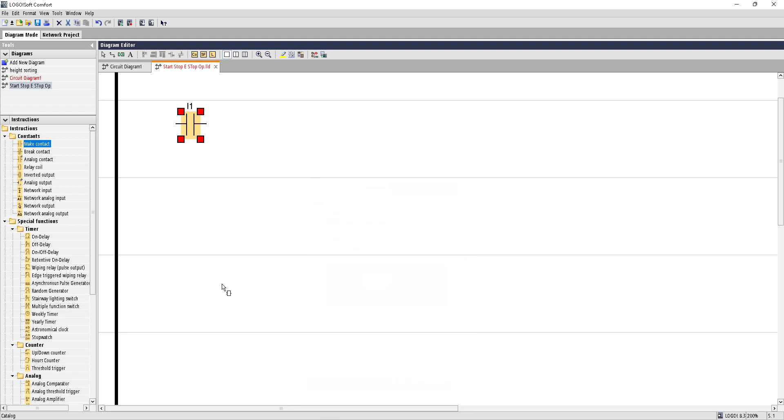So for the start switch we will bring in a make contact with I1 input, and in the simulation tab we will choose momentary push button. For the break operation, that is for the stop switch, we will need a break contact; it would be our I2 input. In simulation we will make sure it is momentary push button.

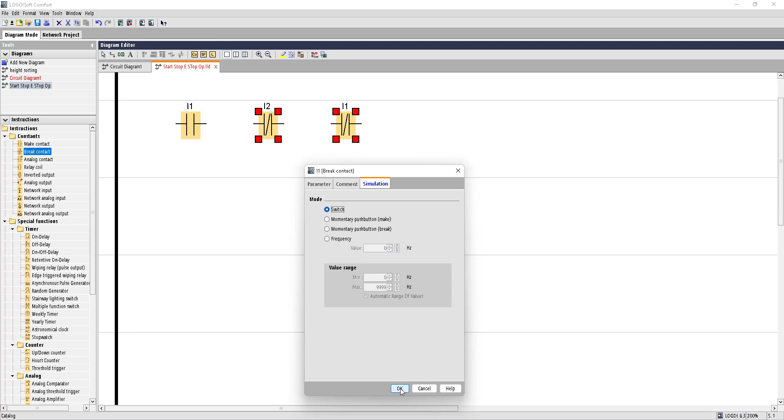And for the emergency stop switch, it's also a break contact; we will choose I3 for the emergency stop switch, and in the simulation tab we will choose switch for emergency stop operation. Now we'll bring in the output, that is our conveyor belt, as Q1. For the latching operation we bring in a make contact, and this make contact would be for Q1. So go down and choose Q1 here. Let's connect them.

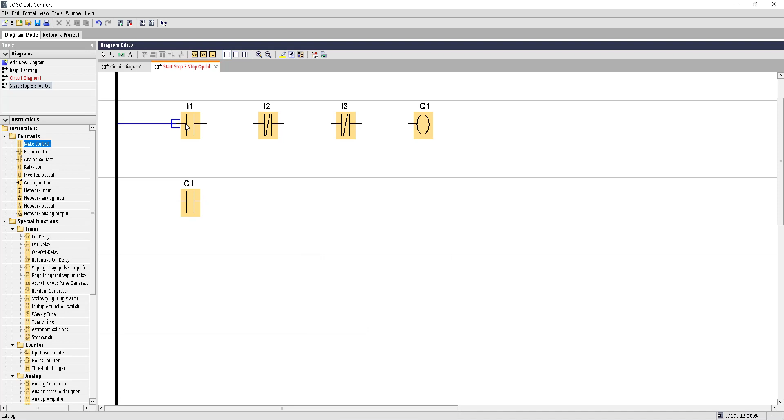Well, now we need to put the 3 indicator lamps into the circuit. We'll bring in the green light, that is the starting operation or running operation. We'll bring in the red light, that is the stop operation, and we'll bring in another relay coil for emergency stop operation. Now this green light will only light when the conveyor belt is on and there is no emergency.

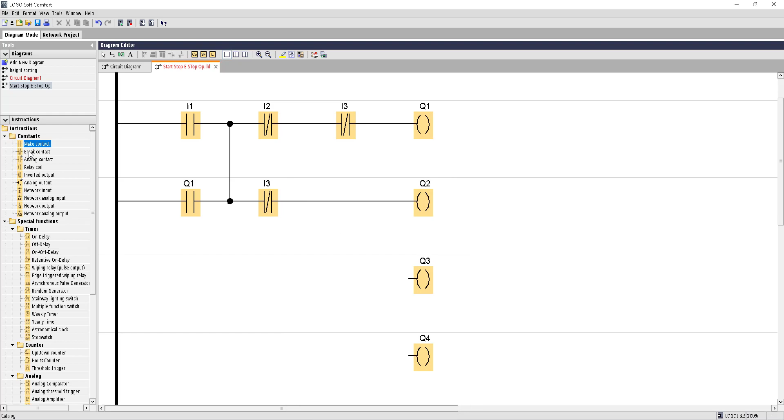So to include the emergency condition into the ladder, we'll bring in a break contact here, and this break contact would be for I3. So connect them. For stop operation, the stop operation light will only light when the conveyor belt is turned off. For that reason we will need to bring in a break contact, and this break contact would be for Q1.

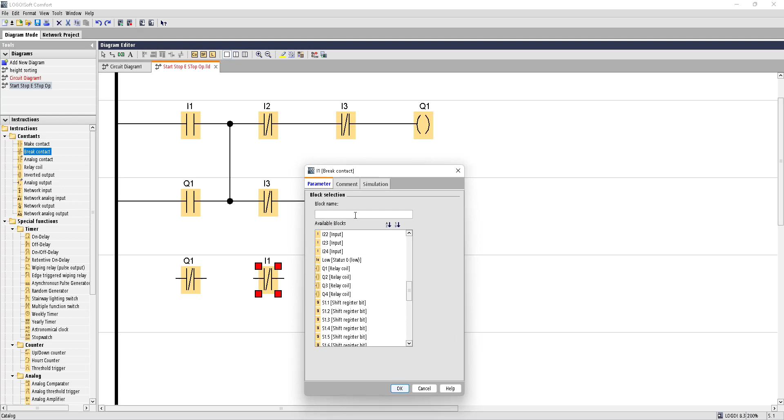And also we need to include the emergency stop condition here, so another break contact, and this break contact would be for our emergency stop button, that is I3. And finally Q4, the emergency stop light, will only turn on when the emergency I3 button is pressed.

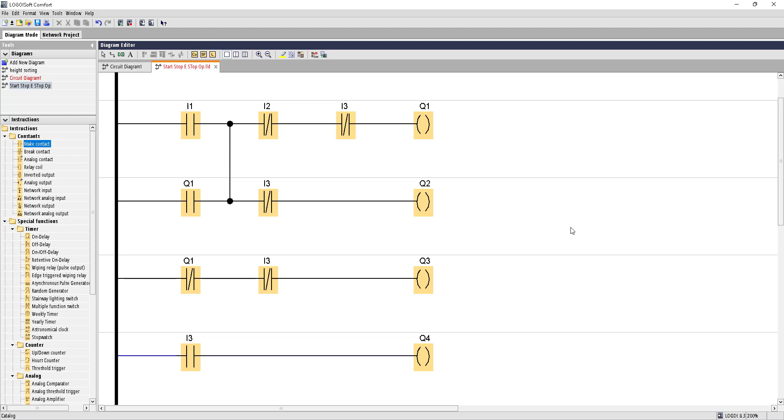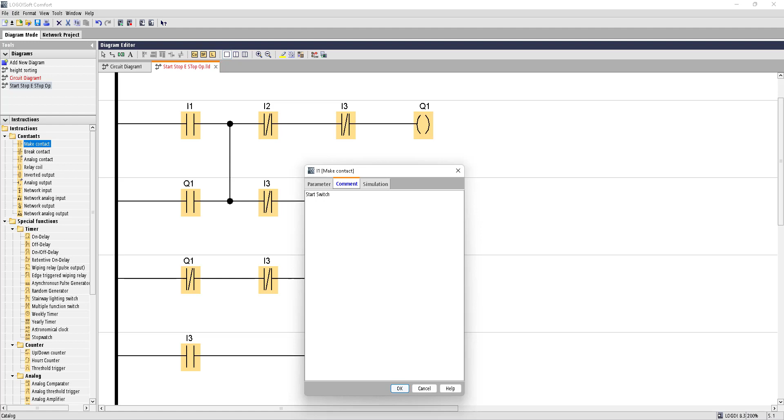Well, let's give the circuit components their names. I1 would be our start switch. I2 will be used for the stop switch. I3 is our emergency stop switch. Q1 is our conveyor. Q2 is our running status indicator.

Q3 is our stopping indicator, stop operation indicator, and Q4 is our emergency indicator.

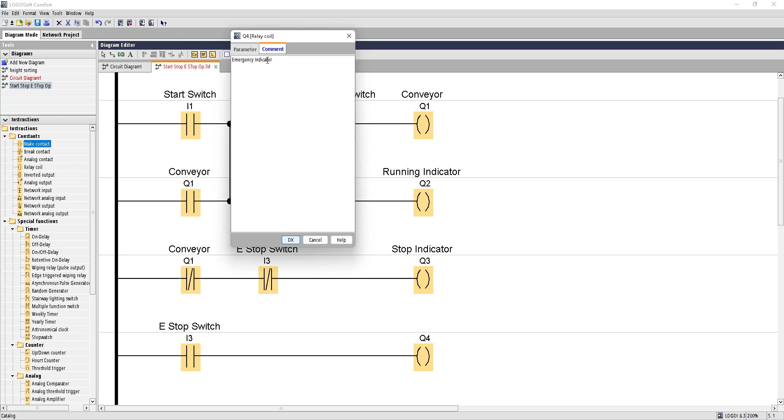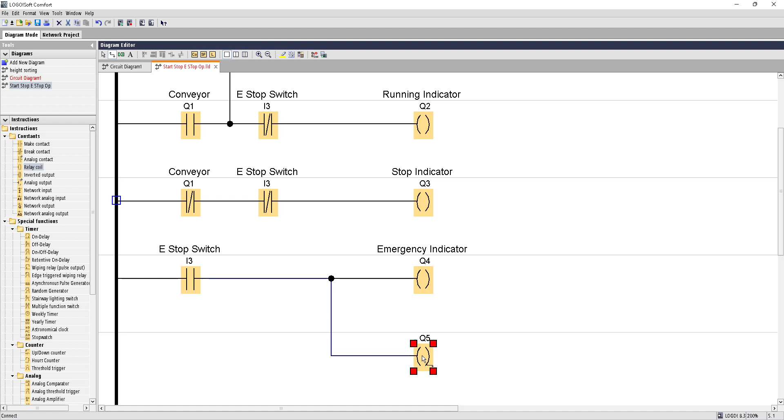Now suppose you also want to sound a siren for emergency, not only the indicator lamp. What we can do for that, we can bring in another relay coil, that is Q5, and this would be used for the emergency siren, and this will be basically a similar operation to the emergency indicator. Whenever the emergency indicator turns on, the emergency siren will also turn on. So this is our siren.

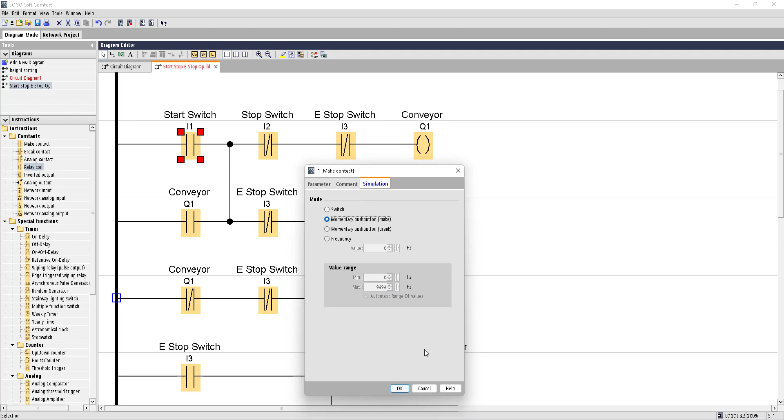Well, before going into the simulation, you need to check if all the switches have the right parameters. So choose the start I1 and check here that it is in momentary push button. I2 should be in momentary push button. I3 should be in switch mode. Well, let's run the simulation. Using this simulation icon, we can turn on the simulation.

So here we have the buttons: a start button, a stop button, and emergency stop. I1 is the start operation switch, this is stop, and emergency stop is in 0 mode, that is normal mode. Pressing I1 will turn on Q1, that is our conveyor belt. So Q1, our conveyor belt, is running, as well as Q2, the starting or running operation light, has turned on.

Whenever I press I2, the stop operation switch, this will turn off Q1, that is the conveyor belt, and turn on Q3, the stop operation status. Whenever I press start again and the emergency condition occurs, it will turn on Q4, that is the emergency indicator lamp, and Q5, the emergency siren, and it will turn off the conveyor belt and other indicators. So this is how we can program the 3 operation indications.

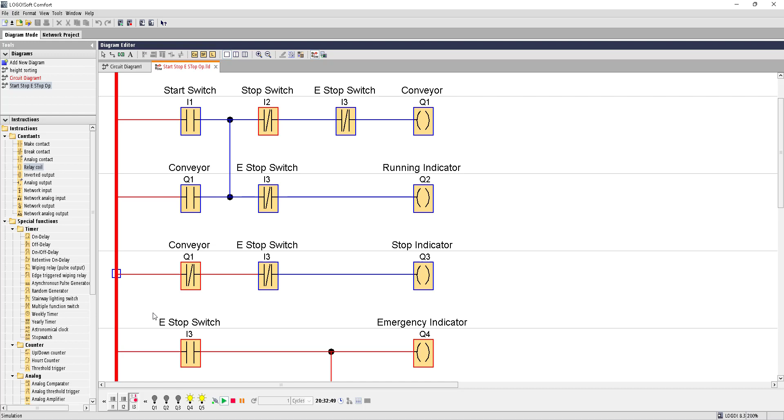If you want to display the operation status in your LOGO!Soft display or the LOGO PLC display, you can do so by bringing in the message text block. We need to enable this. We need to terminate this message block also.

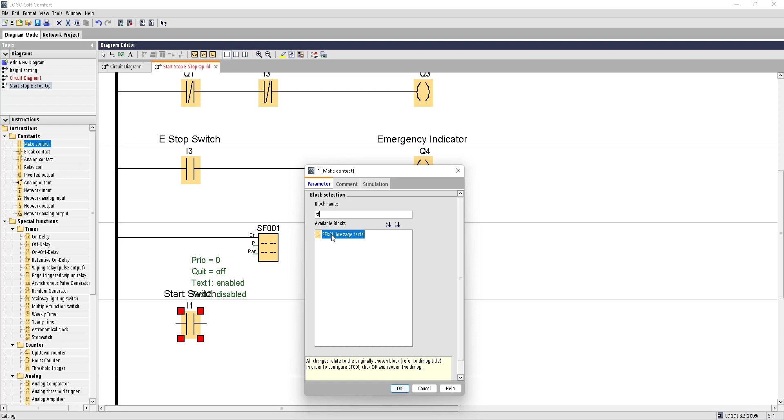For that reason, we will bring in a make contact. This make contact will have the property of SF001, so you can type it here, SF, and it will bring in the block. Now we need to bring in a relay coil that will have a flag memory just to terminate the message block. You can choose any flag. I am choosing an arbitrary flag.

Now let's design the message text display for the program. Suppose running status, so I have typed it running, and to bring in the status of running indicator, we will press this on off. It will bring in this window. From here we need to choose digital output and the Q1 for running operation status.

Stop status, if it is in stop mode or not, so bring in this on off block, choose digital output and choose the Q3 we have chosen for red indicator, that is stop operation, so choose Q3, press OK.

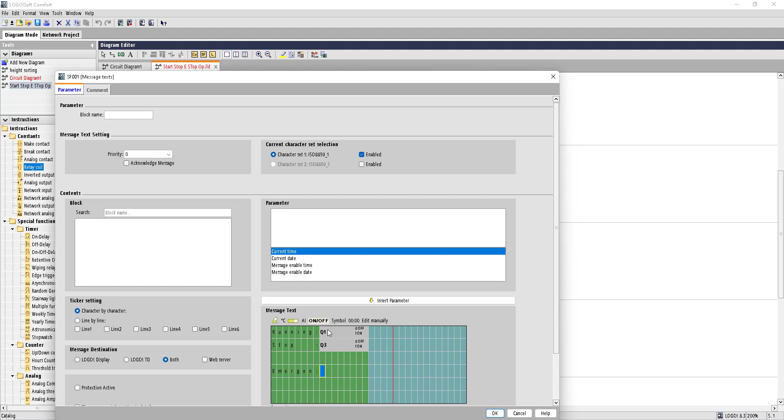Emergency condition, if it is an emergency or not. So emergency condition, whether emergency is turned on or off, we can show here on off from digital output, and Q4 or Q5 both are for emergency operations, so you can choose it here. So whenever the emergency condition arises, the emergency light will turn on and it will show the on off status here.

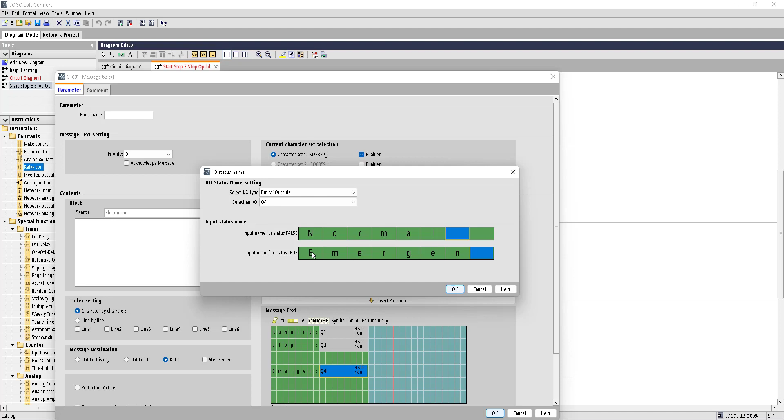You can also customize this message block, like when it is not emergency, it's in normal, and when there is emergency, it will show such message. So whether our display is working or not, we can check it out from here. Let's bring in the simulation again.

You can see our emergency stop is pressed, that's why the emergency condition is here. Let's bring in normal mode. The PLC is in normal condition. Whenever I am pressing this I1, the running condition is on and stopping condition is off. Whenever I am stopping this, the running condition is off and stopping condition is on.

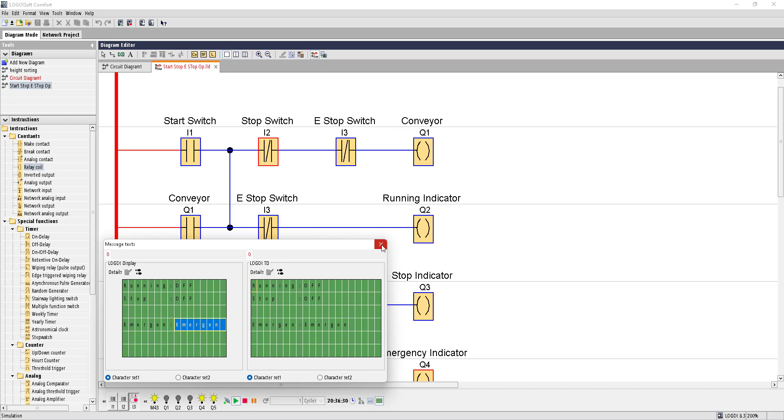Whenever in running mode I press this emergency stop switch, it will turn off both the green and red indicator and turn on the siren and emergency condition. So far so good. We need to upload this program to our PLC. For that reason we will go to the network project tab first. From here we will add our PLC device.

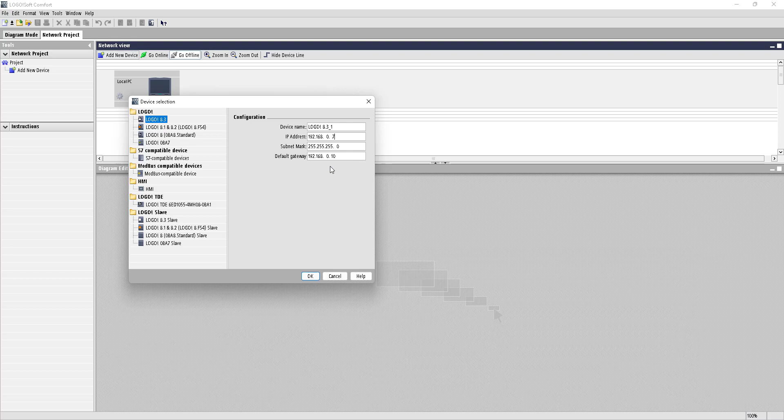Choose your PLC model. Here you need to put the proper IP address and other addresses associated with your PLC. Correct IP addresses and other addresses have been put in. Press OK. Then go to Tools, Transfer, PC to LOGO. Once this window comes, you need to choose your right driver, Realtek Gaming GbE family controller.

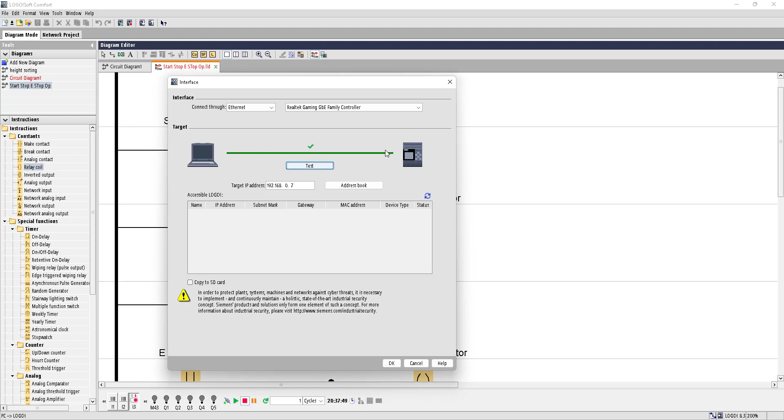You can also check if your PLC is properly connected or not by the test button. If it gives a green tick, that means your PLC is connected. Now to upload the program you need to press OK. The program has been successfully uploaded. Now we can connect this program to our Factory IO environment and see if our program works or not.

Hardware diagram, we will explain here how we will connect them in the physical device. So we have here our SMPS 24 volt DC power supply and LOGO PLC. First of all we will bring AC power supply into this L and N input port. Then we will have our three inputs. We'll bring in our three input switches.

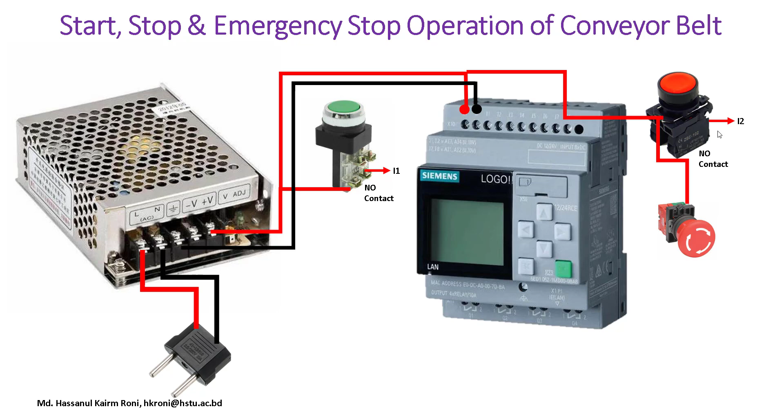The green is the start switch, the red one is the stop switch, and this red turnable switch is the emergency stop switch. We'll power them up, and from green we'll bring the NO contact output, and it will be connected to I1. Similarly, the red stop switch will be connected to I2 input, and the emergency stop switch will be connected to I3, and we have 5 outputs, Q1, Q2, Q3 up to Q5.

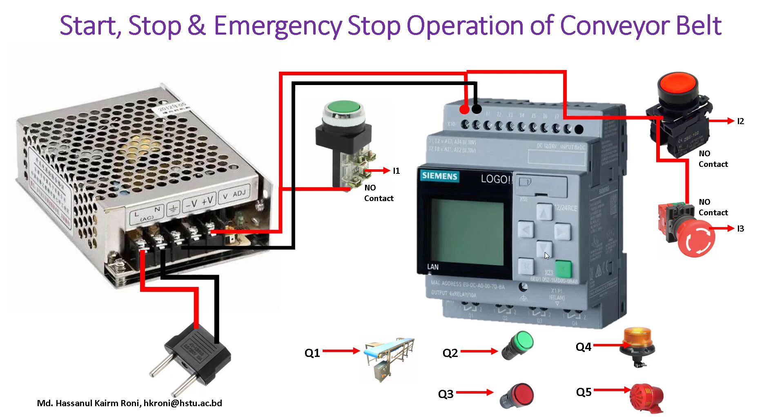All these outputs will be connected to our LOGO PLC outputs. But you need to remember that here we have only 4 output ports in the LOGO PLC. So if you need additional output ports, you can use expansion modules like DM8 which has 4 inputs and 4 additional outputs. You can use DM16 which has 8 inputs and 8 outputs.

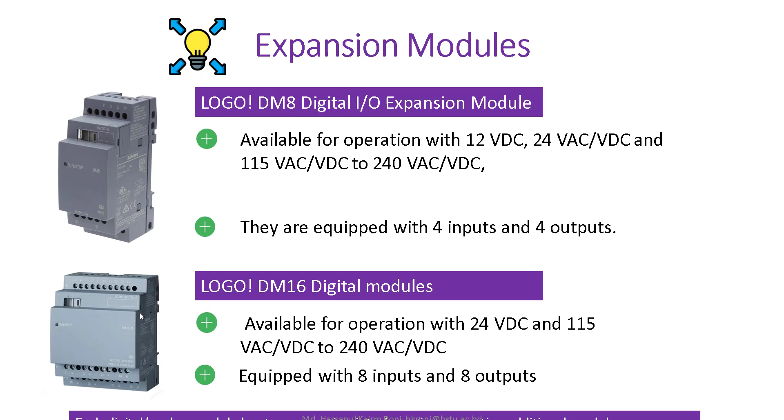But remember, DM series are digital expansion input output modules. For analog they have separate modules like AM2, 2 analog inputs and 2 analog outputs. You can add these expansion modules to increase the capacity of your LOGO PLC.

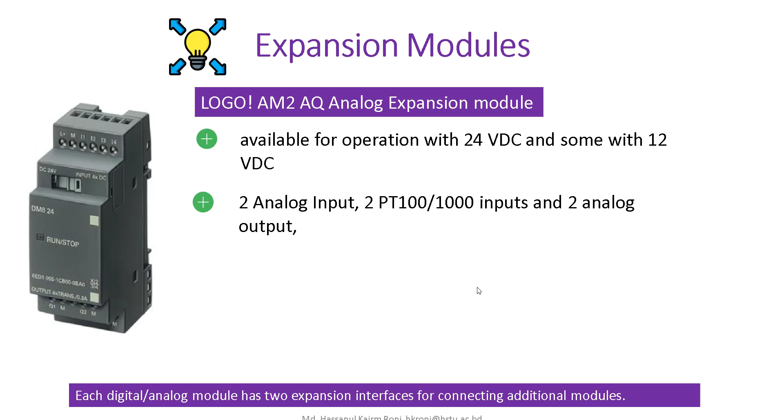Well, let's design our Factory IO environment for our program. Once we come here, go to file and create a new scene. On the right hand side you will find the palette window. From here choose all. You can find the conveyor belt here by typing conveyor. Bring in a conveyor belt. I am bringing in the 4-meter conveyor belt.

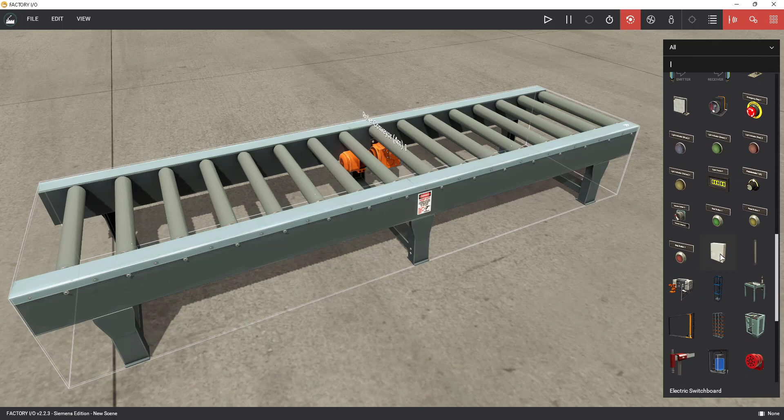Now to place the components, I will find an electrical box like this one. This is called electric switchboard. So bring it into the scene. Now we need a start switch, a stop switch and emergency stop switch. 3 switches we need. So bring in emergency stop switch. So bring in a green start button.

So bring in green start button. You can bring in the stop switch, place it here. Yes, it's properly placed. Bring in the emergency stop switch.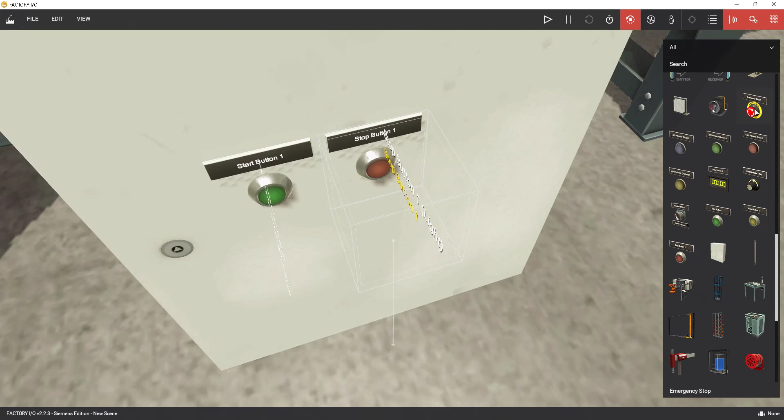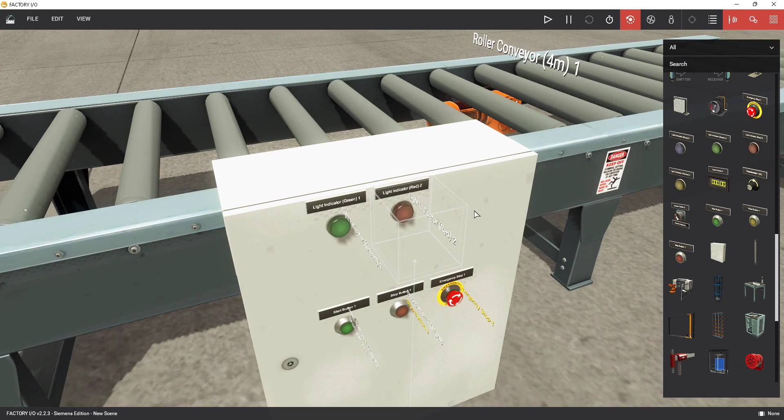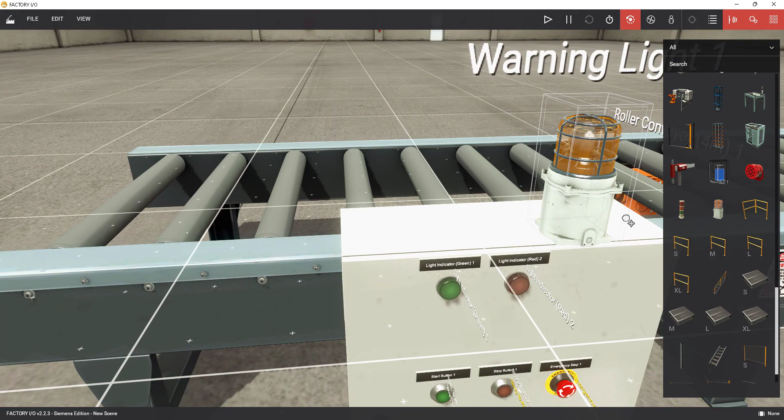So these 3 are our input. For indication we can bring the green indicator light. So let's bring them up. Let's bring in the stop indicator lamp, and for emergency we can use lights like this, warning lights. So let's place it here. Let me realign them. Well, it sounds okay here.

Now also we need to put our siren. So this is a siren, alarm siren, bring it here. Well, so this is all the devices we need for our simulation. Although we are not using these input switches for running the operation, we will be using the hardware setup.

If you want to use this switch for input, you will need to bring in the network input into the ladder diagram, but ignore them for now. We will use our hardware setup inputs for this green start button, stop button, and emergency stop button. So this is the setup. Now let's design the diagram to connect with our ladder diagram of PLC.

From file, we'll go to driver option. From here you need to choose your PLC. So I'm choosing Siemens LOGO. Now this Siemens LOGO, if you need to reconfigure the input and output ports, then go to configuration. From here you will find how many input and output pins you need. We have 4 input pins, so I'm choosing 4 here. We have 5 output pins, so I'm choosing 5 here. Then go back. It will reduce the size of the board here.

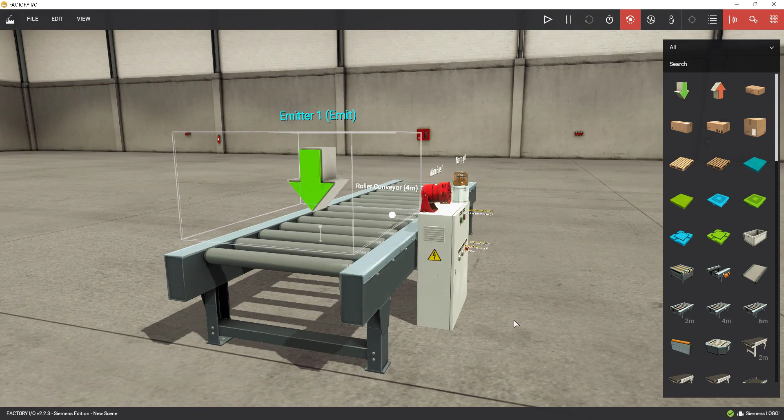To see if our conveyor belt is running or not, we can bring in an emitter here. It will emit boxes to our conveyor belt. Let's bring it down a little bit. Well, so this will emit boxes, and this box will be on the conveyor belt. On the other side we need to use a remover. Let's bring it into the scene. Let's see if it's aligned or not. Bring it down by pressing V. Well, I think our scene is ready. Now we need to go to our hardware and see if our program works fine or not.

Welcome to the hardware demonstration. Here we can see we have 3 input switches and 3 indicator lamps. The motor is now in off condition. The conveyor belt is off. Once I press this start button, this will turn on the conveyor belt operation and the motor will be on. The green light as well as the indicator lamp is also showing the running status condition. Now if you need to stop the operation, you just press the stop button. It will stop the belt as well as the indicator lamp will turn on as red.

Now if you need to run the motor again, you just need to press the start button. It will turn on the conveyor belt. Now suppose in the normal running mode, you can see that our normal operation is running. If any fault or any emergency situation occurs, we can press the emergency stop button here. Let's press it. Once I press it, the conveyor belt will go off, and you can see the emergency indicator lamp as well as the siren is turned on.